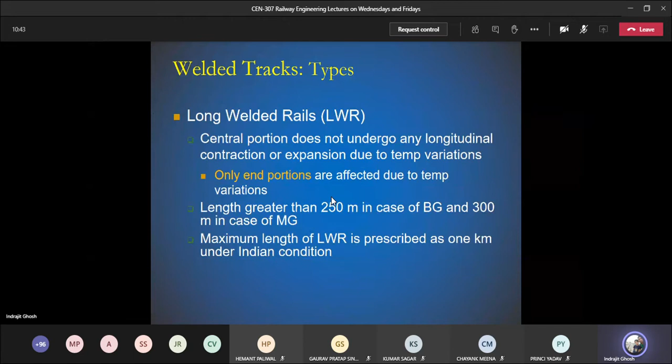So short welded rail, long welded rail, and there is one more, known as continuous welded rail. This one is even larger than the long welded rail. If the length of the rail is more than 1 kilometer, 1000 meters, we call it continuously welded rail. Sometimes it runs from one station to another station.

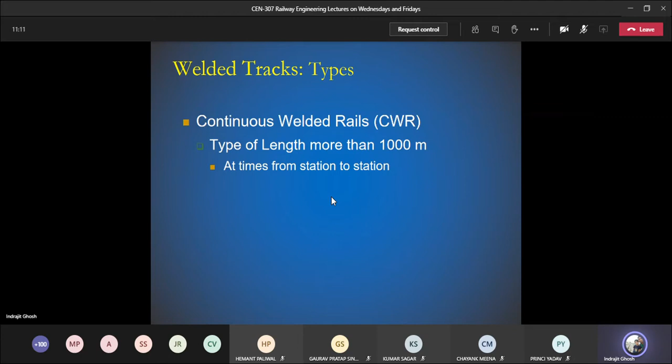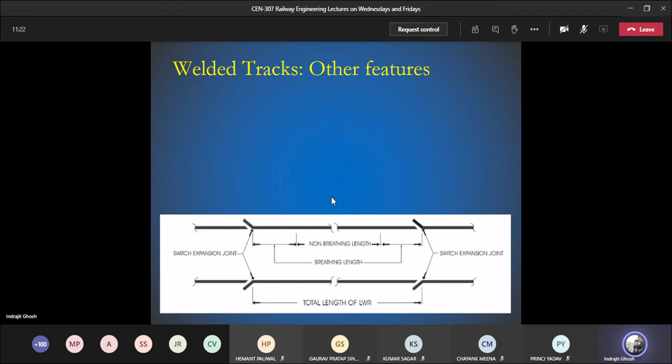So now that we know a little about welded track, let us see some features. What is the specialty of this track? Here you can see we have something known as breathing length. If you look at this photo that I have included, this is continuous, shown with this kind of shape. Here it is ending, here is the start of one rail, it goes like this, then there is a cut, again the rail ends, then the second rail.

So at the end portion here, we have the section of the rail where it is expanding and contracting. These sides are known as the breathing length. Whereas the middle portion, which is not undergoing any expansion or contraction, is known as the non-breathing length. And what we see at the ends are obviously joints, because two rails meet each other.

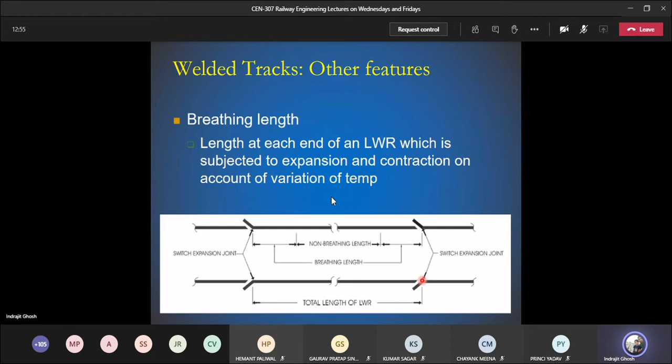In case of long welded rail, we do not weld them; rather we have a specific mechanism called a switch expansion joint. Let us see what a switch expansion joint is. Another thing I want to bring to your notice is that this is the total length of the LWR. Though there is a certain gap, actually this sharp edge of this rail will go up to this position. We'll see some real photos.

So here is an example of a switch expansion joint. An expansion joint, which obviously accommodates contraction as well, is installed at each end of the LWR, which is the breathing length, to permit expansion and contraction of the adjoining breathing length due to temperature variation. So with the rise and fall in temperature, it will be able to accommodate it.

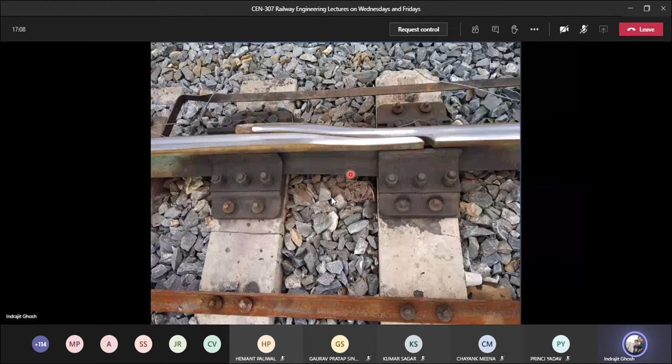So now I have close photos. These are taken from a railway track on the border of Rajasthan and Gujarat, where I visited. Here you can see that the fastening system starts here, it goes there. And what is the length of breathing length? Length of LWR. So this is a part of LWR. This is part of another LWR. So whenever we say what is the length of LWR, up to this? No, the LWR extends up to this point. In case of this rail, the length of LWR will be considered up to this point.

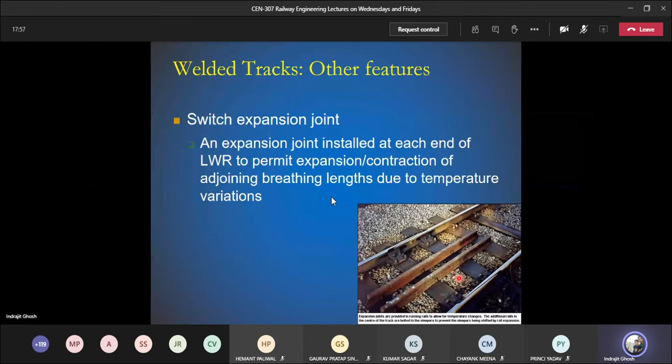Here you can see that there is nut bolt kind of fastening, and we have some different kind of mechanism that we will be seeing during the discussion of fastening. Here we have the concrete sleeper, but in the photo that I included earlier, you can see that we had wooden sleeper. So we have seen different types of sleeper in case of switch expansion joint.

Earlier, when we did not have switch expansion joints, when we mainly had wooden sleepers, at that time we used some kind of special rails which are known as buffer rails. So we used them in place of switch expansion joints at the end of LWR to accommodate the expansion and contraction that is happening at the breathing length.

The standard of the rail was higher compared to normal rail because those were being positioned at the joint of LWR. The gap was fixed at 7.5 millimeter, so the gap was okay. It doesn't mean there is a gap like switch expansion joint, a halfway gap. It was a full gap just like normal rail, and it was only applicable for wooden sleeper.

But it has been discontinued on Indian Railways because it has been found that over time its maintenance is going to create problems for the safe running of the train. Many times it has been observed that the train is about to get derailed, so we got rid of those kinds of buffer rails. Now we have the switch expansion joint that we have seen.

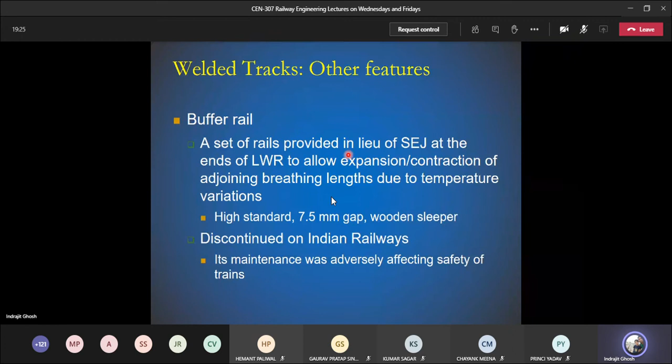Now there are certain locations where we do not use long welded rail, that we need to know. So long welded rail, you can understand, runs almost a kilometer. Minimum is 250 meters in case of broad gauge, 300 meters in case of meter gauge.

Now we have to be very careful whenever we go for this sort of welding. Until and unless the track, the different components of the track up to the formation level are stabilized, we do not go for the use of long welded rail.

So in case of new construction, a new line being laid, we are going for new route kilometer, or if we are going for doubling of line - we had a single line and are trying to increase the number of lines so that trains are not getting delayed, we are not increasing route kilometer, rather just increasing track kilometer. So when we are doing any sort of new construction, we do not go for the use of long welded rail.

But there is a condition: if we are going for mechanical compaction of the earthwork - the formation - when we do the stabilization and make sure that the soil is not going to subside, submerge, or sink, it is okay with the help of mechanical compaction with machines. Then we can say that we can use long welded rail.

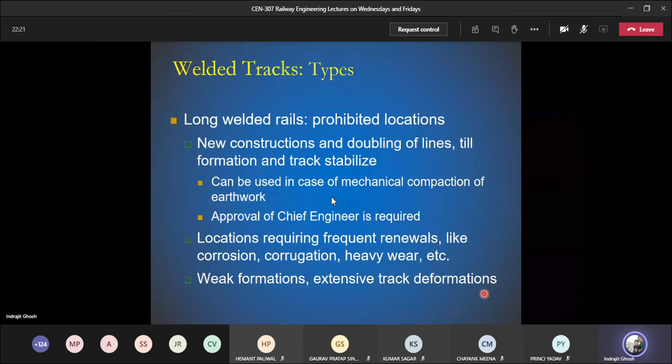Weak formation - the soil properties are such that the formation is not really strong. Extensive track deformation - sometimes there is deformation, yielding surfaces, so we avoid those locations because long welded rail runs from one location to almost a kilometer apart.

Minimum is 250 meters, so there will be problems. Soil susceptible to pumping - this is a property of the soil. Pumping is when the pore pressure is such that at a particular location, as soon as you are compacting the soil or material underneath, water comes out. So those places are not good for long welded rail.

Heavy contamination of the ballast - so renewal is not being done, drainage is not being done. The ballast is such that we need to open the track quite often and do the screening of the ballast using the mesh that we have seen earlier. In that case also, we do not go for long welded rail.

The last one is locations with frequent occurrence of flood or subsidence. Subsidence is basically the sinking of the land at a particular locality, or where flooding occurs maybe every monsoon. So we do not go for long welded rail there.